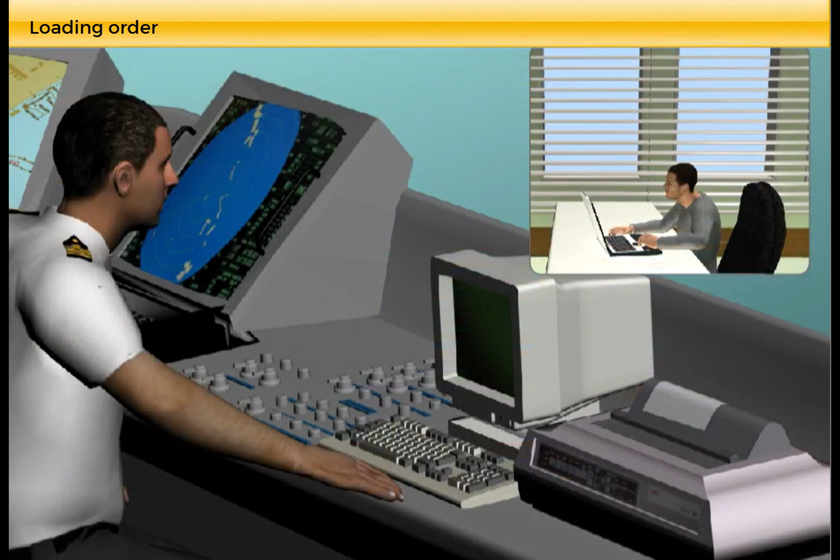Why are the implications of receiving an early loading order more important for chemical, product and gas carriers than for crude oil tankers? The loading order is the basic information needed in order to prepare the vessel for loading. The loading order may vary depending on several factors. For example, the ship is trading worldwide in the spot market, trading worldwide on a time charter party, or trading as a shuttle tanker on time charter in a fixed area, etc.

Requirements for the notification of notice of readiness, laytime, etc. may vary. For crude oil carriers, the practical implications of receiving an early loading order rather than a late are less important compared with chemical, product and gas carriers. Crude oil tankers do not have to prepare the tanks, like water washing, gas freeing and inspecting the tanks for cleanliness, re-inerting or cooling down the tanks, etc., prior to loading the next cargo.

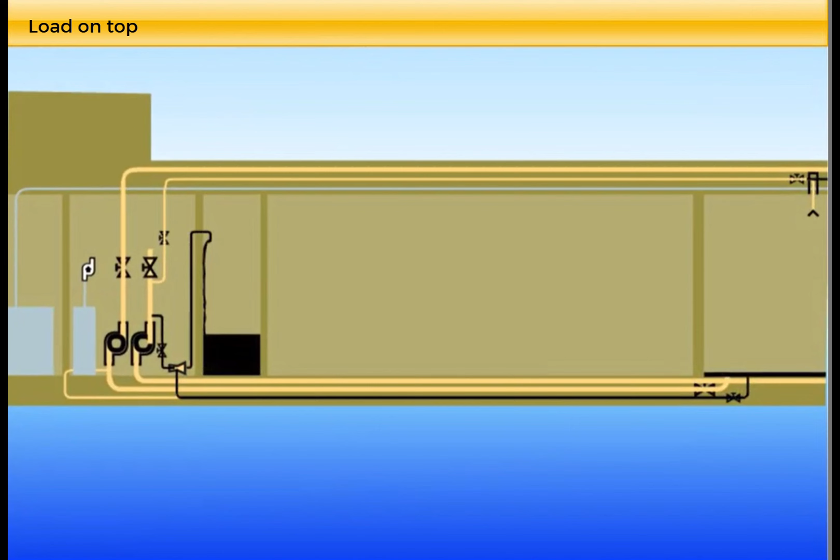In which event can the ship owner lose money because of not having all cargo tanks empty on arrival? When a crude oil tanker has carried out cargo tank cleaning during the ballast voyage, there will be slops and residues collected and stored in one slop tank. If there is any doubt about retaining the slops, the master must communicate this question to the owners and cargo owner or charterers and request their advice.

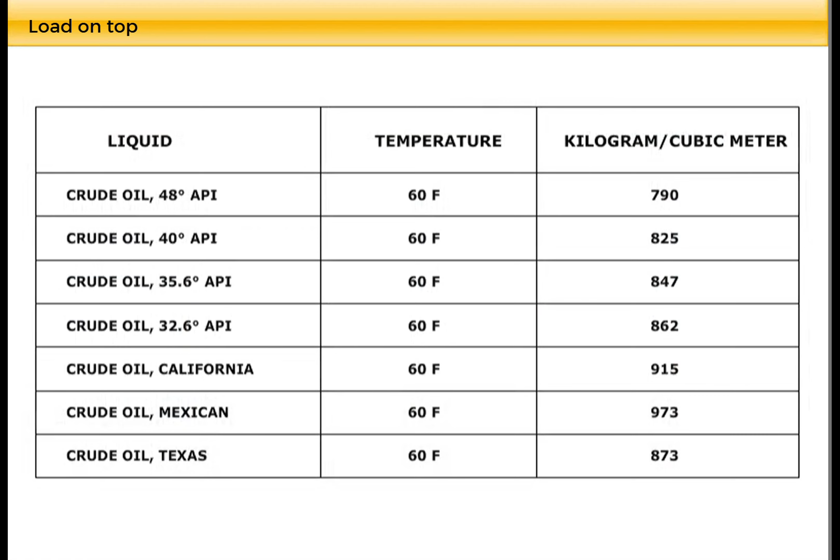Most charter parties provide for the charterer to make the decision regarding the disposition of slops. If the characteristic of the slop oil and the nature of the next cargo permit, the slops may be retained on board and the next cargo loaded on top of them. This is normally done with crude oil cargoes when the same or similar crude will be carried on the next voyage.

The charterer may wish to load on top, or LOT, in which case full freight will normally be paid. Charterers may require the slops to be discharged. The time required to do this normally constitutes laytime used.

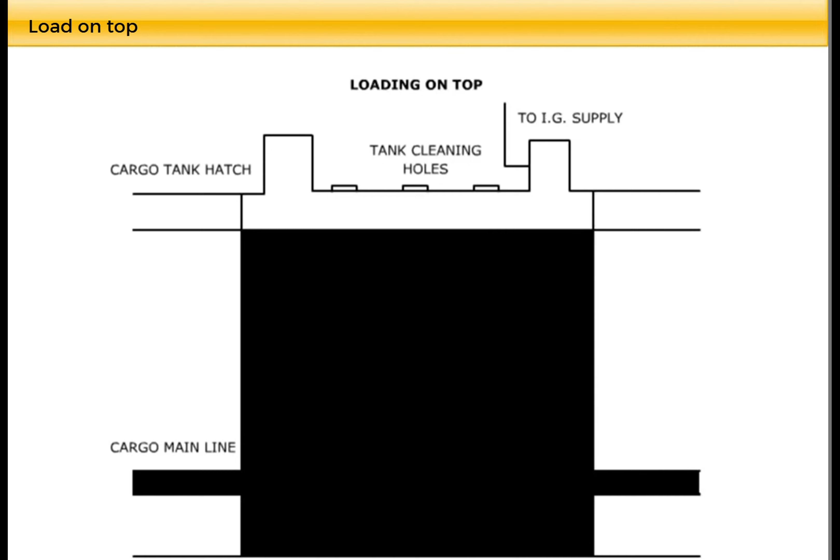If the charterer does not wish to load on top, the slops must be segregated and freight will not be paid to the ship owner on the space or deadweight used. A normal procedure in such cases, and in order to load full deadweight, is that the slop is sold and the vessel deslopped to a slop barge prior to loading.

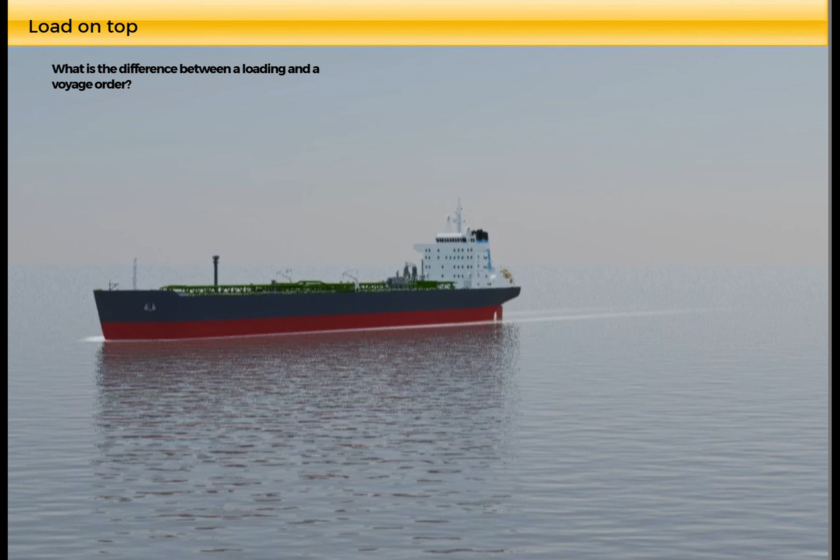What is the difference between a loading and a voyage order? A voyage order is an instruction from the owner or operator or charterers to the vessel's master about where the vessel shall sail after completion of a port call. Even if the next cargo is not settled yet, the vessel needs some kind of instruction on where to sail. For instance, proceed to outer anchorage, drop anchor and wait for further orders, or proceed to Fujairah for orders, etc.

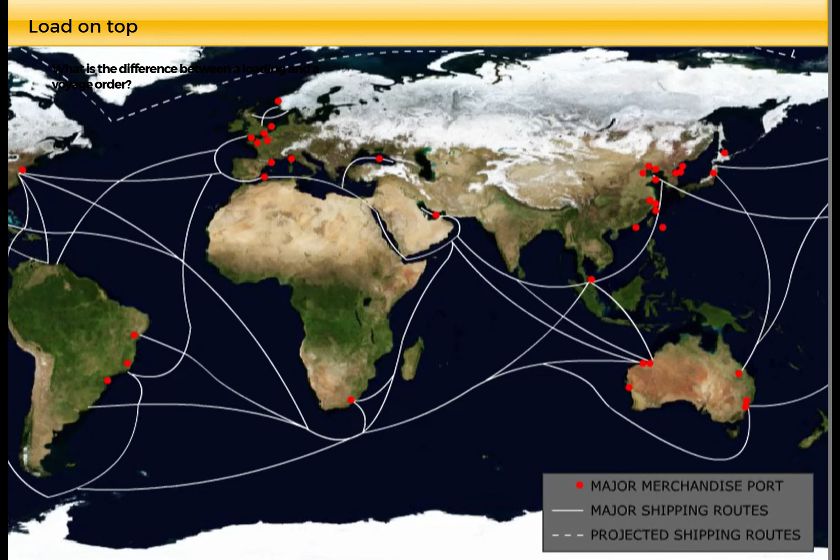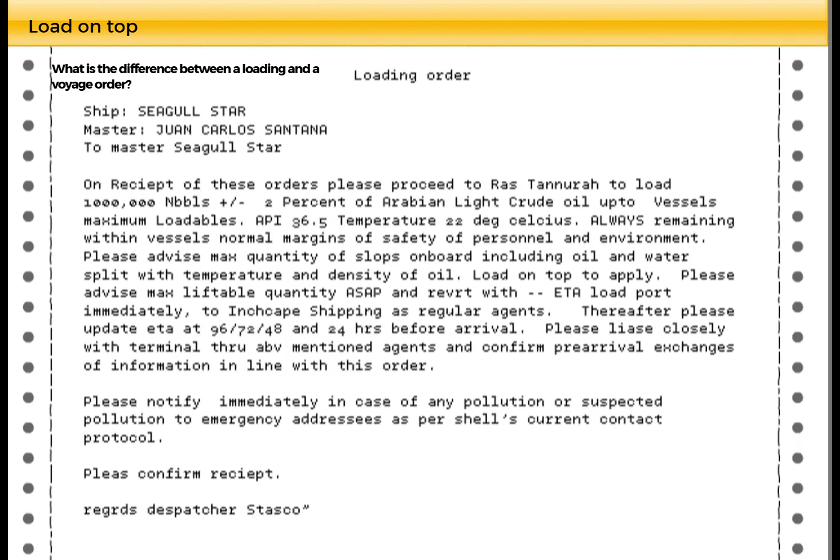The loading order is the specific instruction to proceed to a port or terminal and load a specific cargo, or several grades of cargo and quantity. The loading order also includes an indication of the discharge port or area, which needs to be considered with respect to draft and air draft restrictions during the voyage and at the discharge port. Based on the loading order, the loading plan is worked out by the chief officer.

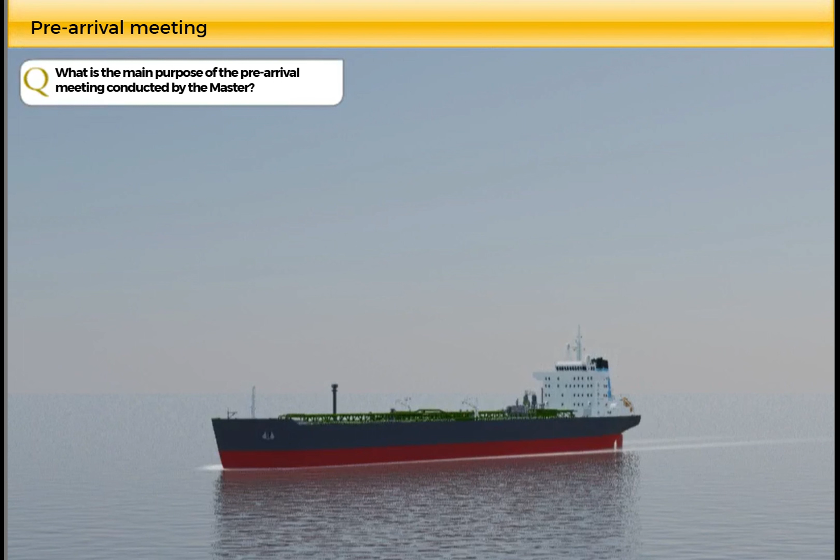What is the main purpose of the pre-arrival meeting conducted by the master? A pre-arrival meeting is performed in different ways, depending on the vessel's trade. The master normally conducts the meeting, and the main purpose of the meeting is to ensure that all officers and crew are acquainted with the time schedule and activities expected to take place during the port call.

Through this time schedule framework, the risk assessments associated with each in-port activity and the ship's plan for mitigating each of those risks is communicated. The contingency plan, which is the result of risk assessments, should be highlighted in the meeting.

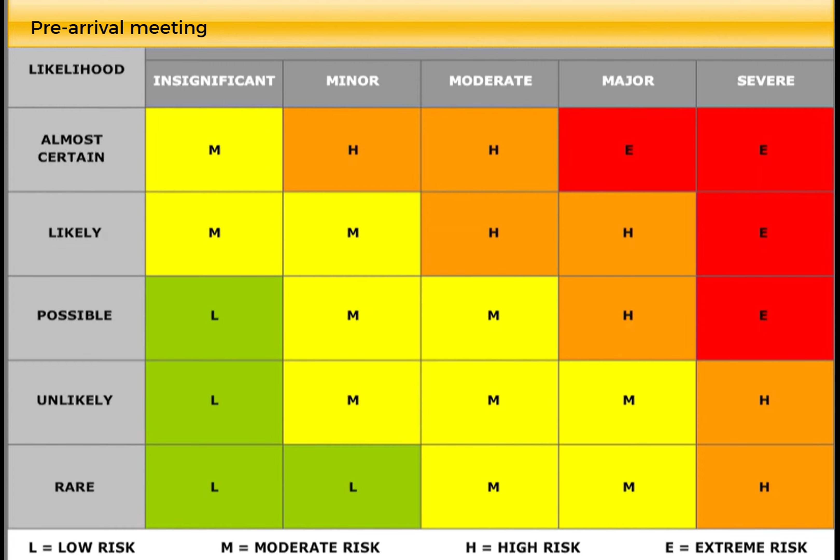Besides the main purpose of a port call, loading or discharging, other activities can be STS lightering, special security measures, crew change, stores and provisions, bunkering, external technical service for the vessel's equipment, various external inspections, etc. In addition, crude oil carriers are frequently involved in ship-to-ship, STS, transfer operations, either for loading or discharge. STS operations are labour-demanding, and because of their nature, subject to special MARPOL regulations.

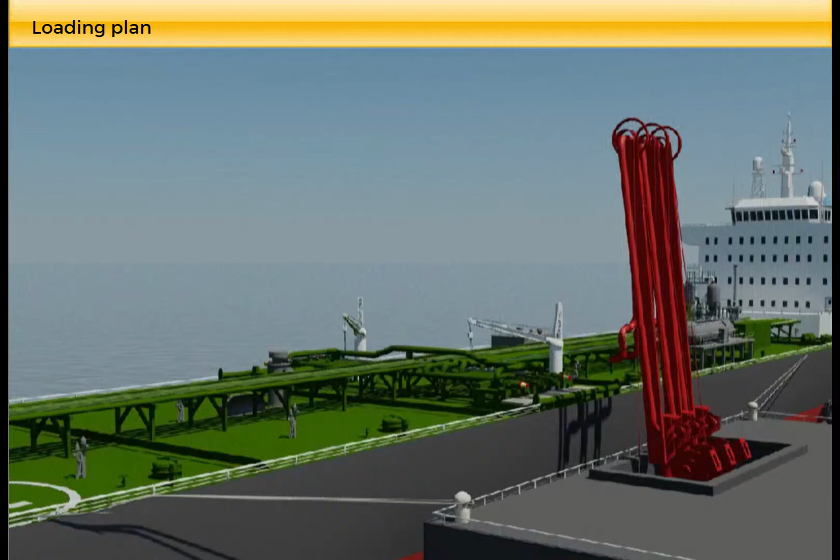Who is responsible for making the loading plan? As soon as the loading order is received, the chief officer, who is responsible for making the loading plan, starts to pre-plan and work out a preliminary loading plan.

What does the loading plan consist of? The loading plan is a comprehensive and detailed schedule that comprises a time bar, which begins at the start of the planned loading and describes the precise steps to be taken, which cargo tanks to start loading in, the tank ullages at which to stop and change over to other tanks, and which ballast tanks to deballast from in a sequence of stages until the completion of the operation.

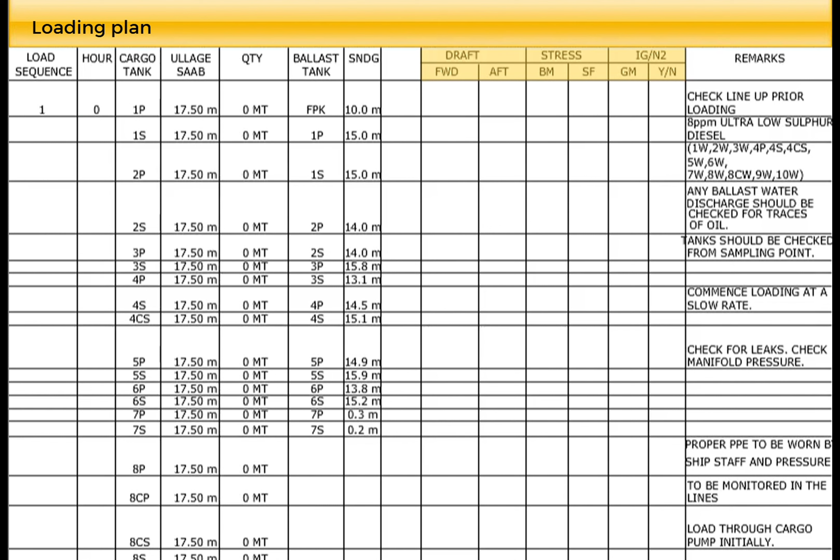The ship's draft fore and aft and the shearing force and bending moments on the hull when each stage is reached are calculated in advance using the loading computer and shown on the loading plan time bar. These calculated drafts and stresses ensure that the ship's hull remains within the permissible limits as prescribed in the class-approved loading manual.

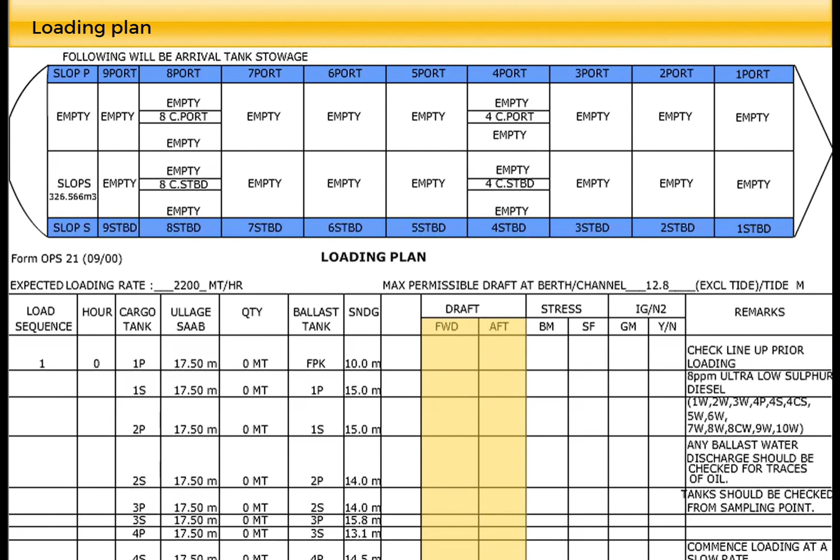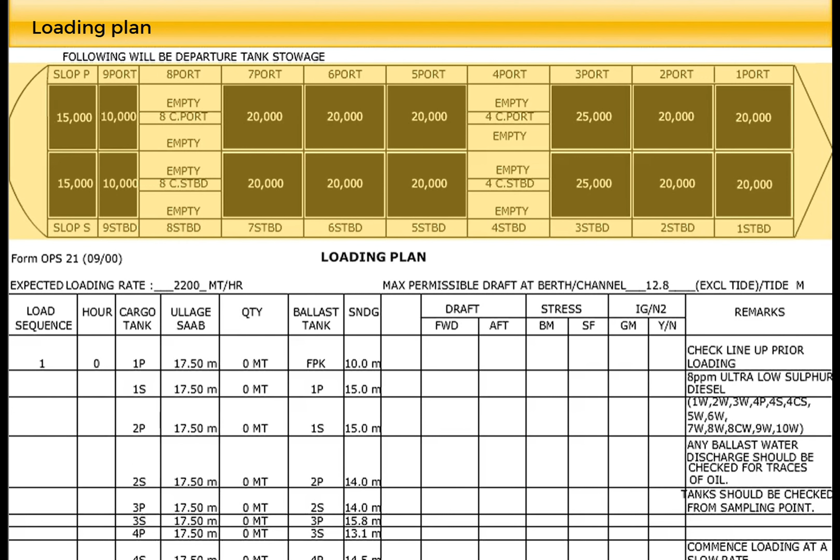Throughout the operation, the indicated tank ullages help junior officers and the pumpman to know when a certain stage of the loading is reached, and the next steps should be taken. Comparing visual drafts with those shown in the plan helps the officers in ensuring that the loading is going safely according to the plan. The plan also shows cargo specifications and a tank diagram spreadsheet with details on cargo grades, quantity, and their distribution into different cargo tanks.

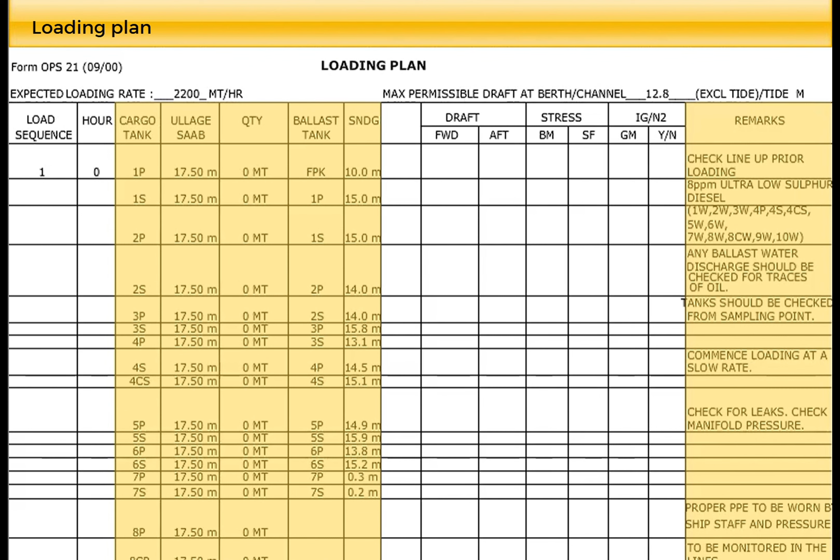Further, the plan details line and valve systems to be used and loading rates, starting rate, full rate, and topping off rate, as well as the deballasting schedule. The chief officer conducts a meeting with the junior officers, such as the second and third officer, pumpman, and boatswain, in due time prior to arrival. The purpose of this meeting is to have their acknowledgement of full understanding of the loading plan.

Who must be familiar with the loading plan? The second and third officer are responsible duty deck officers during loading, and consequently need to be fully familiar with the vessel's cargo system. To assist them during the operation, they have the pumpman, who is a qualified technician and responsible for maintaining the cargo equipment. In addition, they have the boatswain, who is the leader of the deck crew.

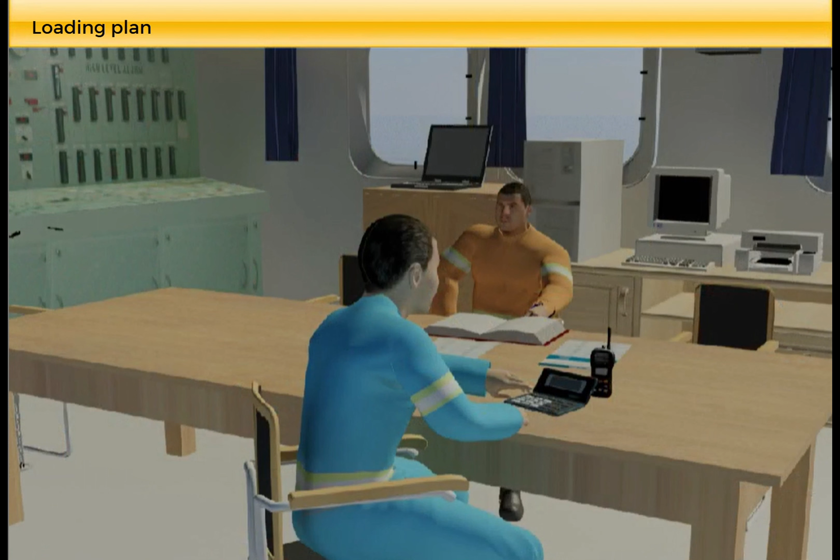The loading plan made out by the chief officer prior to arrival must be considered as a preliminary plan, which cannot be completed until after the ship shore meeting.

What is the purpose of the pre-arrival checklist? Since the introduction and implementation of the International Safety Management Code, or ISM Code, mandatory from 1998, ship owners or other companies responsible for operation of ships have had to develop and implement safety management systems, both for the ships and shore-based organization. The safety management objectives of the company should provide for safe practices in ship operation and systems to monitor and document onboard activities where needed.

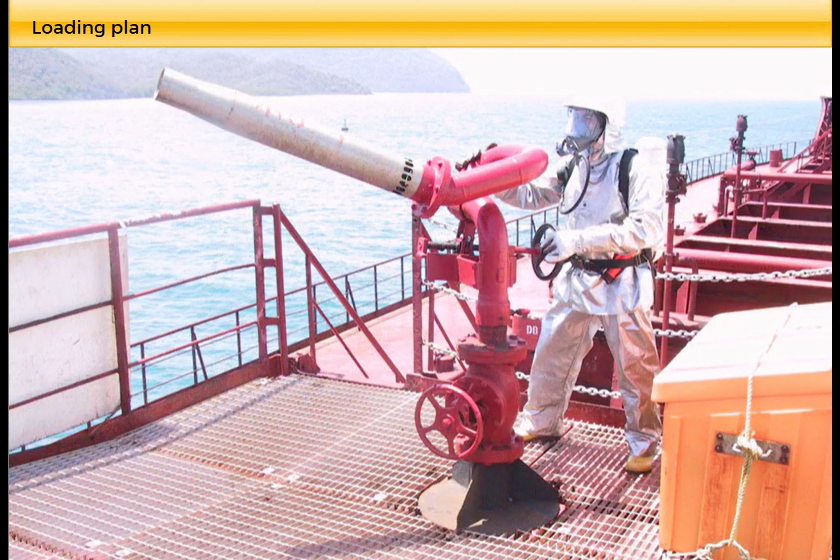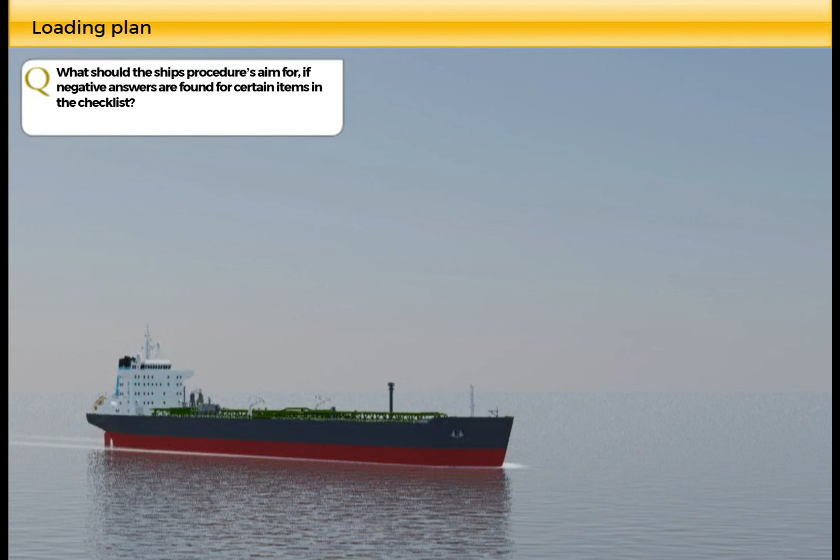Checklists to document safe practices and compliances with rules and regulations, as well as the company's policy, have been developed and implemented as industry standard in connection with various operations on board. What should the ship's procedure aim for if negative answers are found for certain items in the checklist? The checklist must be completed in ample time prior to arrival, in order to allow for repairs of malfunctioning equipment or call for external service upon arrival.

Any negative answers in the checklist must be reported to the owner or operator in order to make a common effort to ensure the vessel's safe and efficient port call without any delays. Who carries out the tasks? The pre-arrival checklist is a comprehensive record of preparations carried out in order to document that the vessel is arriving in a condition according to the company's policy and international rules and regulations.

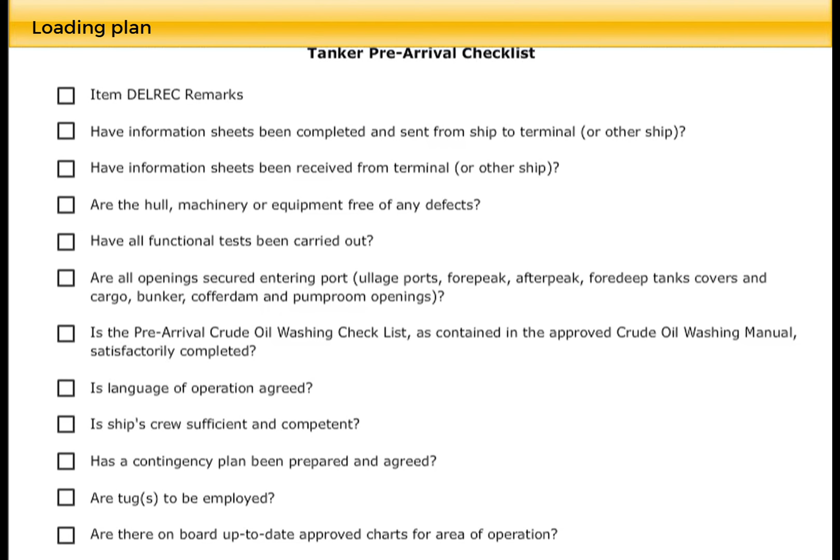All junior officers, including the pumpman and boatswain, as well as the engine officers and crew, will be engaged in testing and checks in order to complete the pre-arrival checklist. In the engine, all the technical systems required by the checklist are to be tested, and the result reported back to the Chief Officer. These tests must include operation of the cargo and inert gas pipelines valve operating systems, hydraulic power packs or boilers for cargo pumps, inert gas systems, ballast and stripping pumps, and alarms and trips of all these.

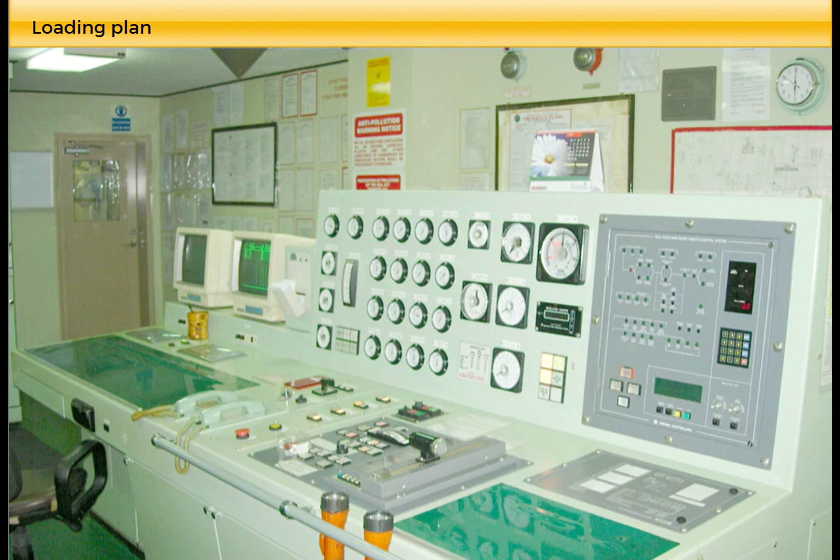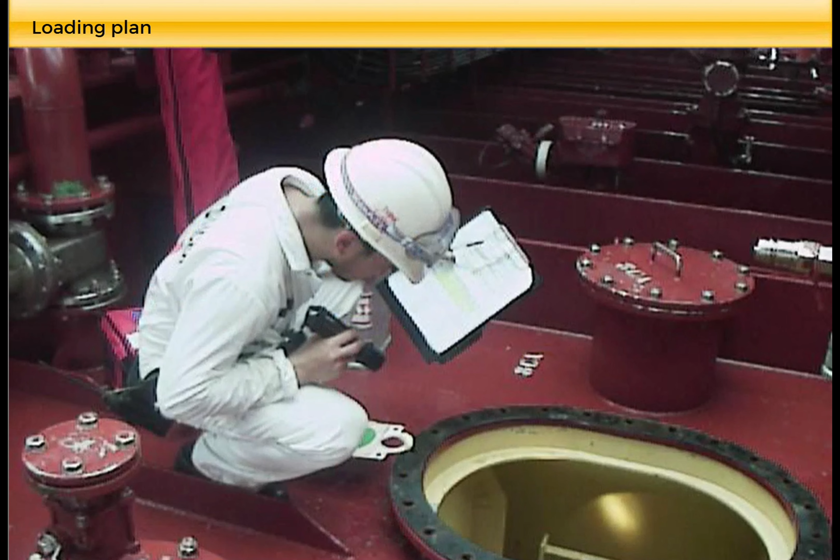The junior deck officers are responsible for checking their designated equipment and systems, such as firefighting and life-saving equipment, navigational instrumentation, etc. The pumpman is responsible for function checking of all cargo-related safety systems and equipment. The boatswain with the deck crew must check and prepare all mooring equipment, oil pollution prevention equipment, accommodation ladders, pilot ladders, hose handling cranes, and deck scuppers, and assist the pumpman with preparation of the cargo manifolds to be used.

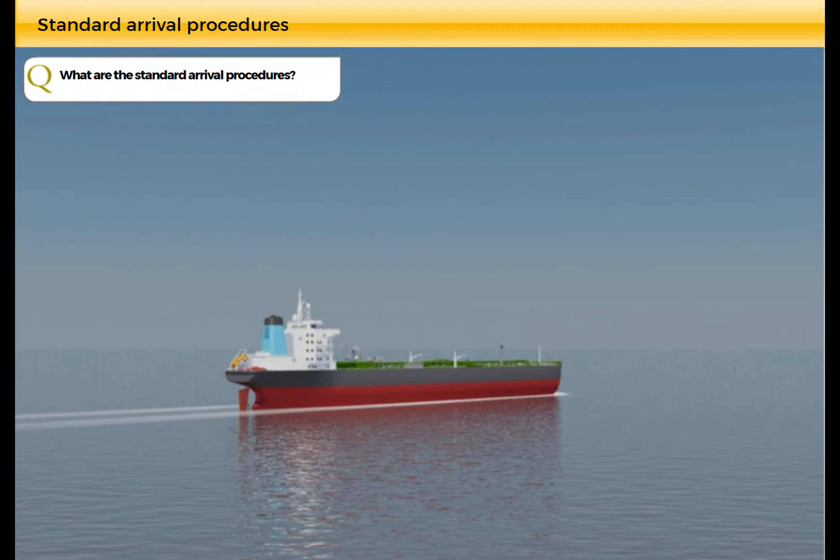What are the standard arrival procedures? When the vessel arrives at port, she passes through the standard activities: pilot on board, entering into port, and moving alongside terminal or SBM buoy assisted by tugboats. Who is responsible for the various tasks? As soon as information on which side alongside has been received, the boatswain and the crew make ready the moorings and, together with the pumpman, prepare the cargo manifolds.

When well moored and the pilot and tugboats are off, the security checkpoint is established at the gangway, and the vessel's port watch system enters into force. When the vessel is cleared by quarantine and customs authorities, the loading master or terminal representative and cargo surveyors board the vessel. The cargo surveyors are representing the shippers and cargo owners or charterers.

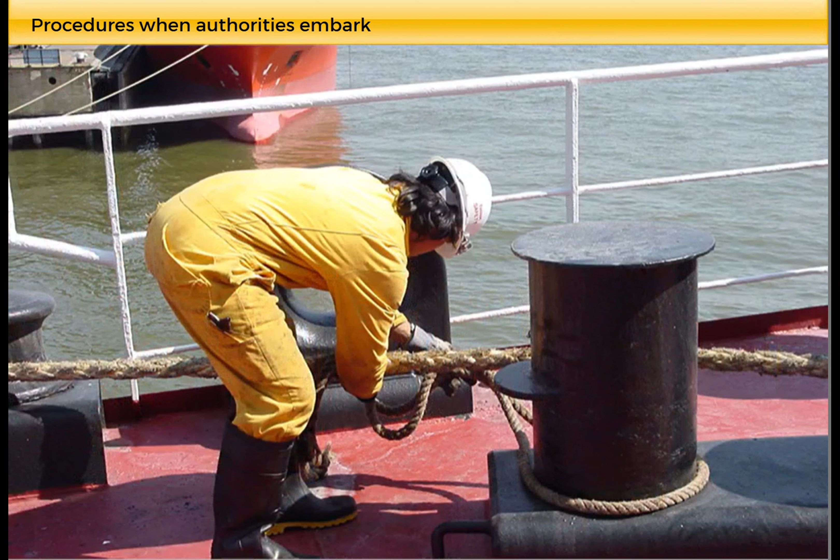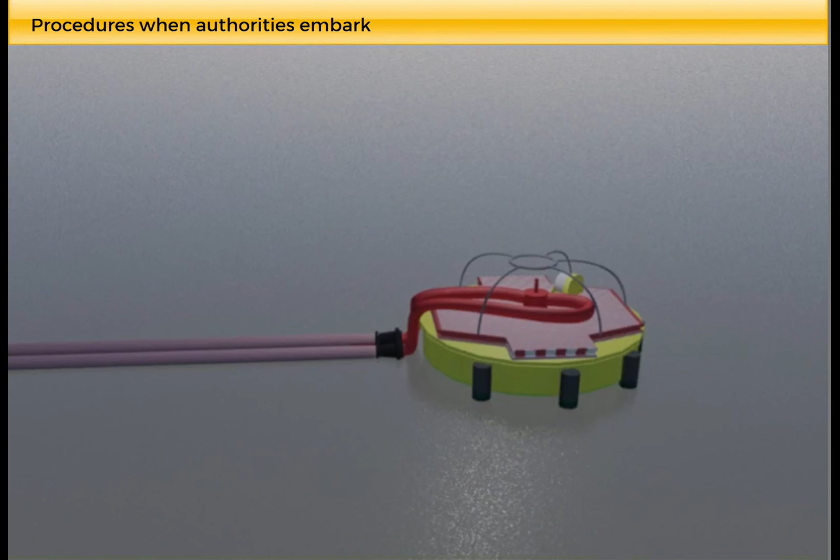The loading master and his terminal staff or crew normally inspect the vessel's manifolds and mooring arrangement before connection of hoses or arms is initiated. From the vessel's side, the duty deck officer is now in charge of the activities on deck under the supervision of the Chief Officer. When berthed to an SBM for loading through floating hoses, the hose connection operation is more demanding and requires experienced hands in addition to supervision of a loading master or his assistant.

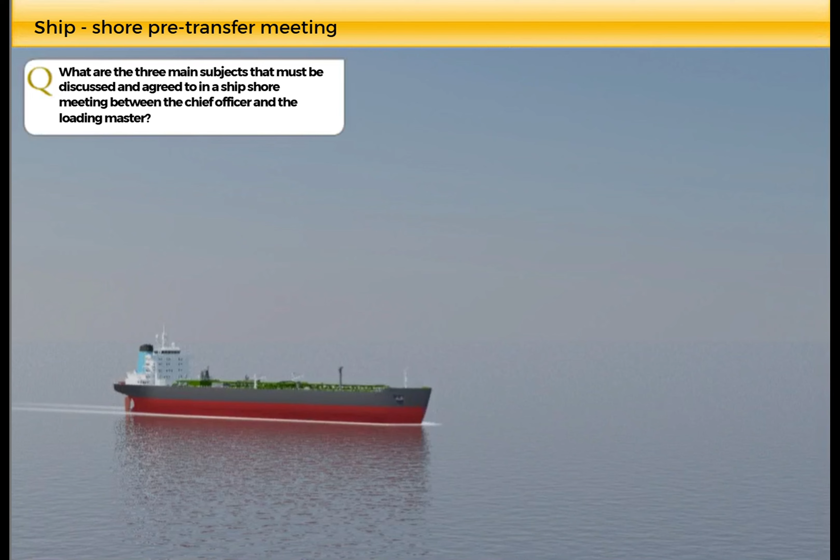What are the three main subjects that must be discussed and agreed to in a ship-shore meeting between the Chief Officer and the loading master? A ship-shore meeting is held in the Chief Officer's office or cargo control room, or CCR, or ship's conference room, for pre-transfer exchange of information.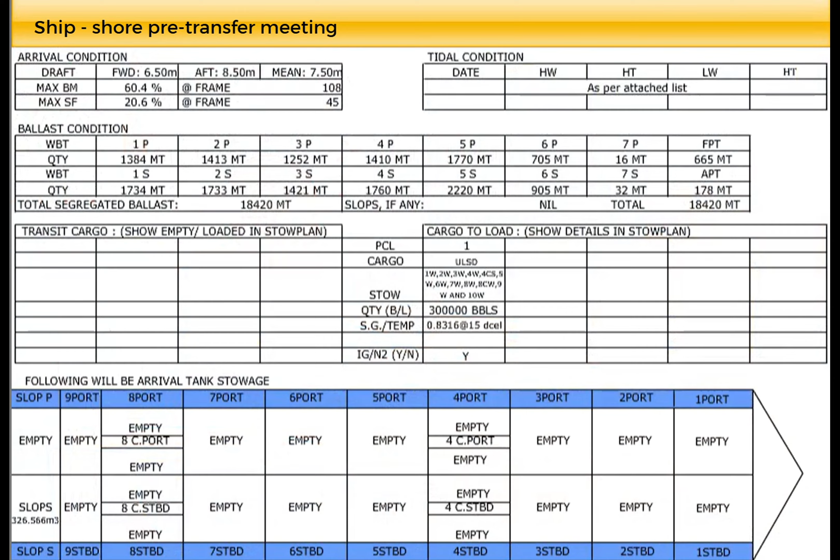The three main areas covered are the loading plan, the safety, security and environment protection, and the communication and emergency stop procedures. Details of the ship's loading plan, usually also communicated before arrival, are discussed, and if in agreement with the terminal's plans, are finalized.

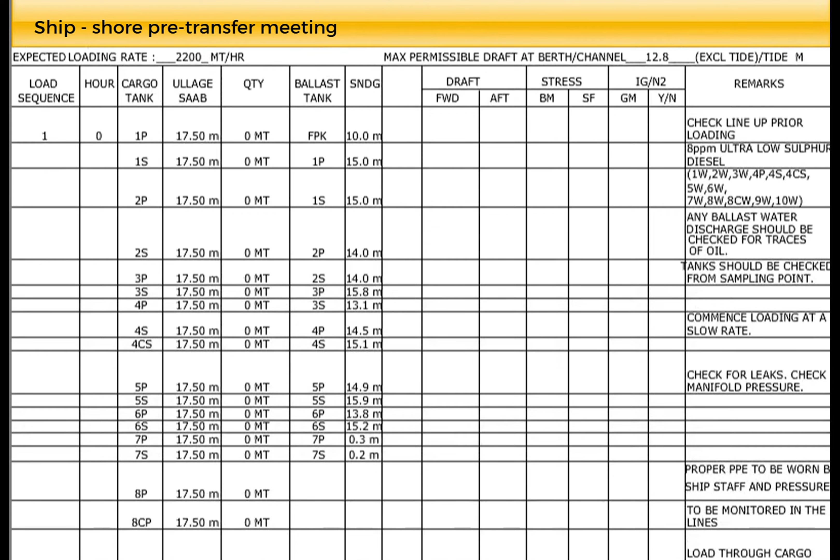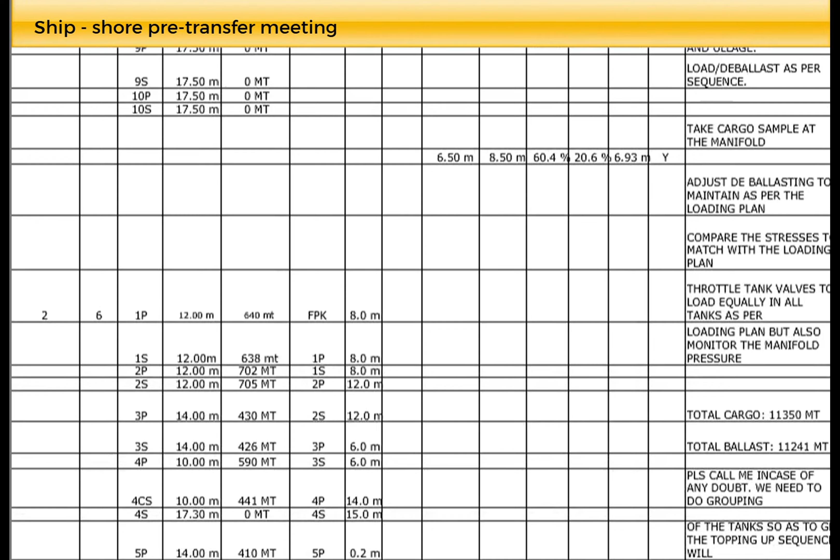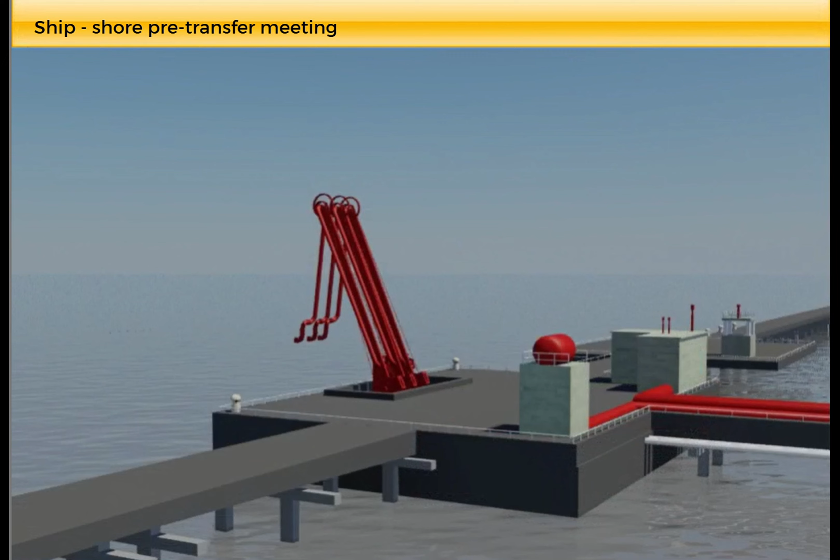The items normally revised and added will be the time schedule, including loading rates on starting and topping off, deballasting operation, ship and shore tank changeover, avoidance of contamination of cargo, and pipeline clearing on completion of loading. Safety, security and environmental protection regulations of the ship as well as the terminal are important matters to be discussed and agreed on. Finally, the communications channels and emergency stop procedures are explained and tested.

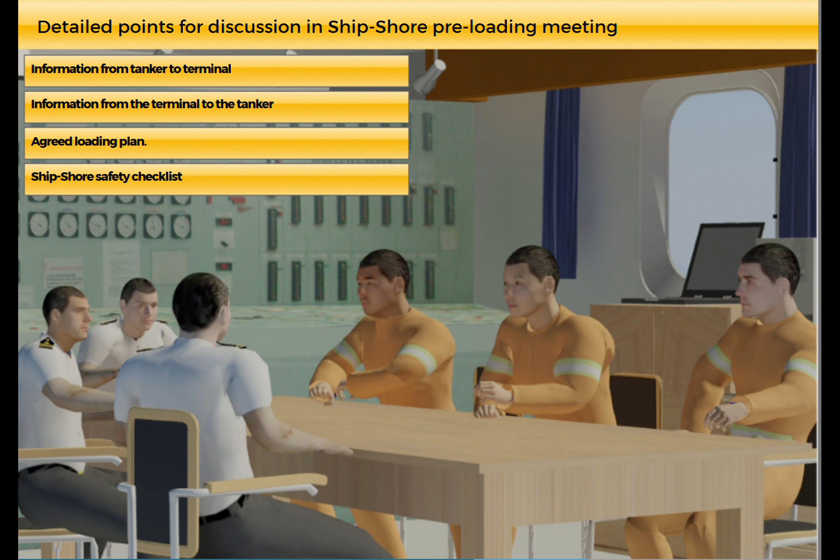Click on the buttons below to view detailed checklists for various areas to be covered in this ship-shore pre-transfer meeting. Information from tanker to terminal. Information from the terminal to the tanker. Agreed loading plan. Ship-shore safety checklist. Ship-shore radio communications test and emergency stops. Posted plans and placards.

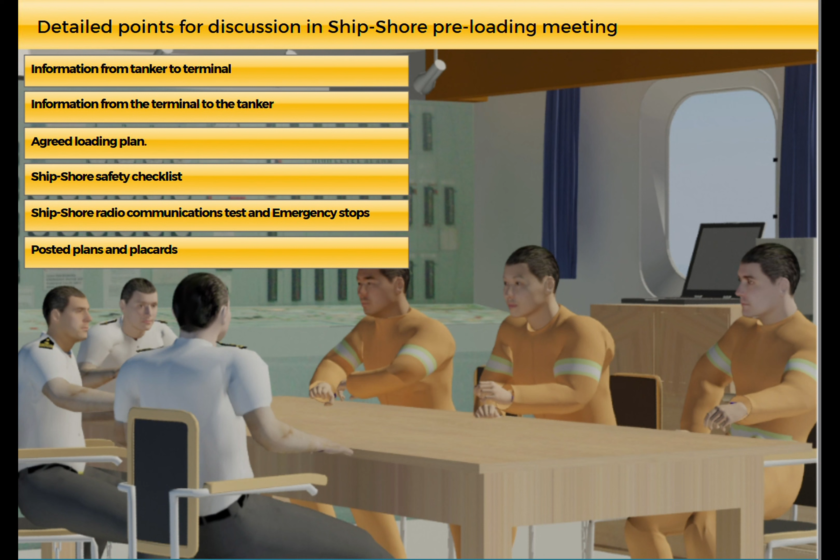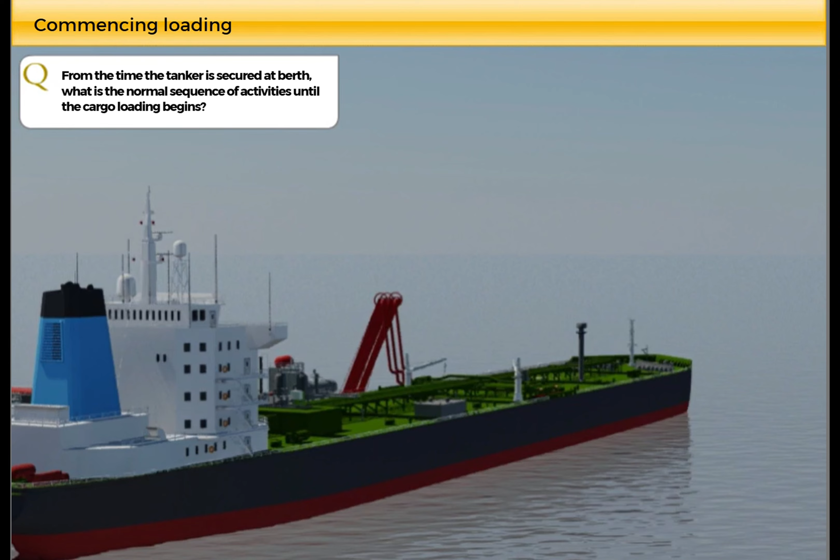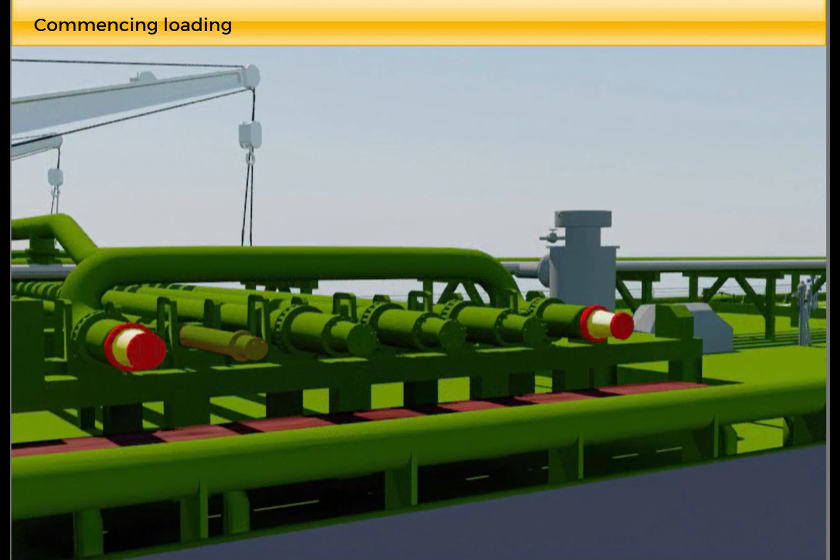From the time the tanker is secured at berth, what is the normal sequence of activities until the cargo loading begins? The cargo loading normally commences according to the following procedure. Formalities with port authorities and terminal or loading master are completed. Cargo hoses or arms are connected and unused manifold connections blanked. The vapor return line is connected. VOC system prepared. Cargo surveyors complete the tank survey. On-board quantity, or OBQ, is calculated.

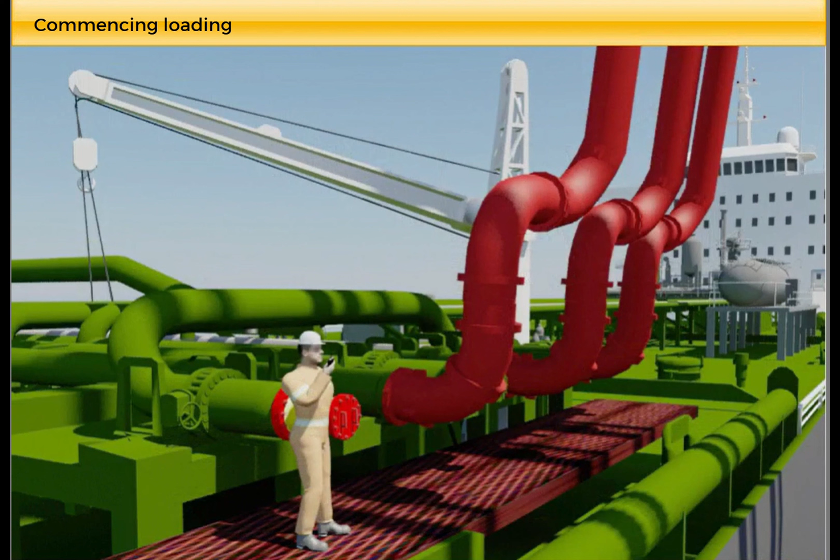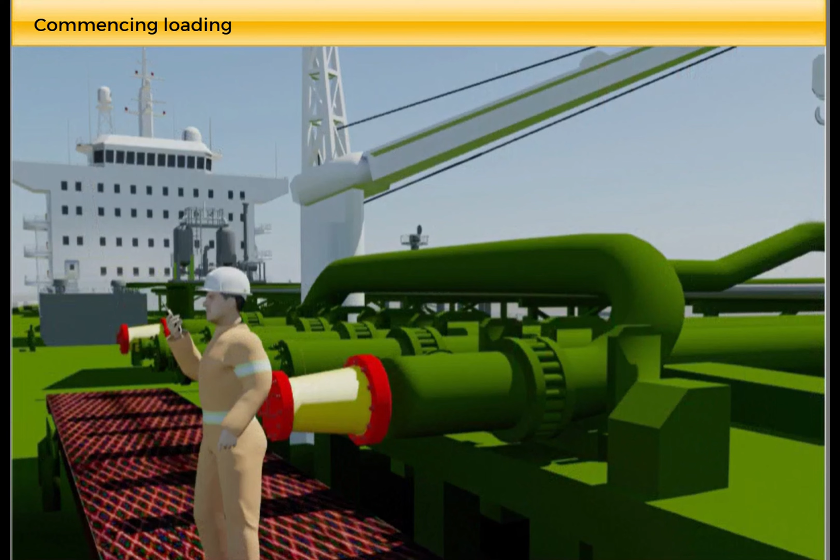Lining up of lines and valves to be used, both onshore and on board, under the supervision of the Chief Officer and Loading Master. When lining up is completed, the Chief Officer reports to the Loading Master that the vessel is ready to receive cargo, except for manifold valves which still are closed. The Loading Master orders the vessel's manifold valves to be opened according to the agreed loading plan. When the manifold valves are confirmed open, the Loading Master orders loading to start, first with line displacement at reduced rate.

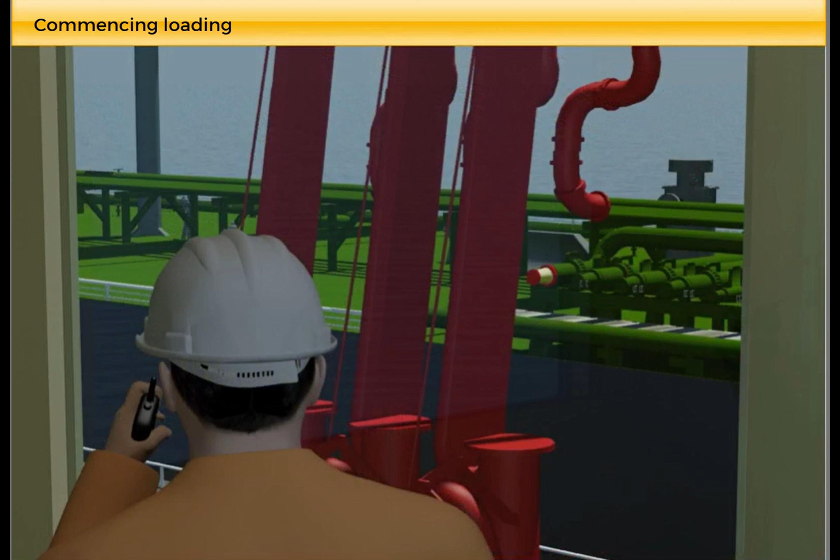The duty deck officer, pumpman and boatswain with deck crew must, during this sequence, check valves and lines in use to ensure that no malfunction or leaks have occurred when the cargo oil entered. To ensure that there is correct lineup of valves for drop lines, bottom lines and tank valves, the first cargo is taken into one tank at reduced rate. When confirmed that the oil flow is according to the loading plan, the remaining tanks are opened, and the loading rate is gradually increased.

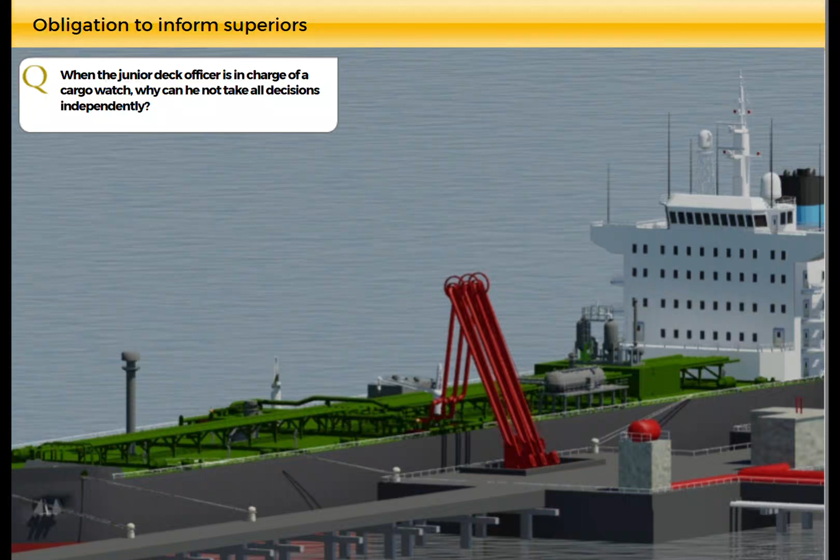When the junior deck officer is in charge of a cargo watch. Why can he not take all decisions independently? When the loading is well underway, the Chief Officer delegates the practical operation to the duty deck officer, pumpman and boatswain. The Chief Officer's standing order details the duty deck officer's obligation to inform the superiors in the event of incidents or accidents that may interfere with the operation, for instance oil leaks, breaking of moorings, thunderstorms, etc.

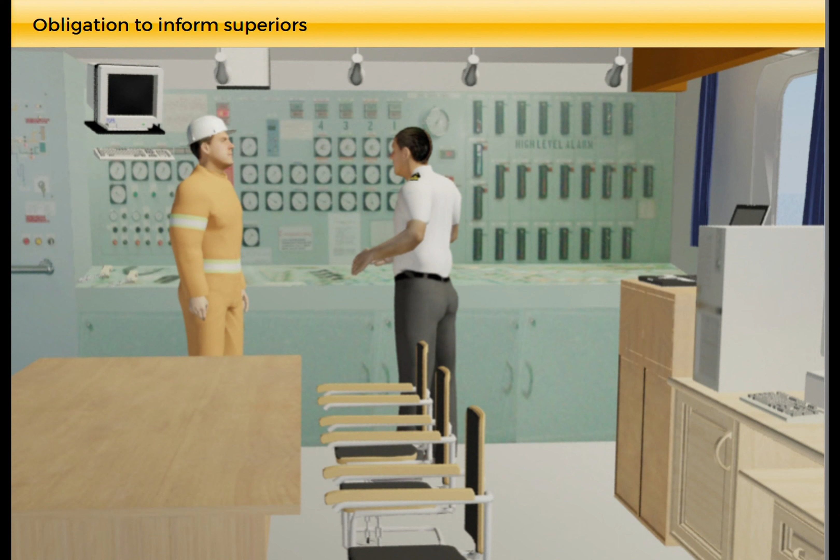In addition, the Chief Officer requires to be kept updated on the progress of the loading and any deviation from the loading plan, such as reduced loading rate or stoppages initiated by shore, etc. The need to inform superiors whenever in doubt is to prevent one-man errors during the operation, and to use the best experience available to address unforeseen risks which may occur from time to time, and which have not been allowed for in the plan.

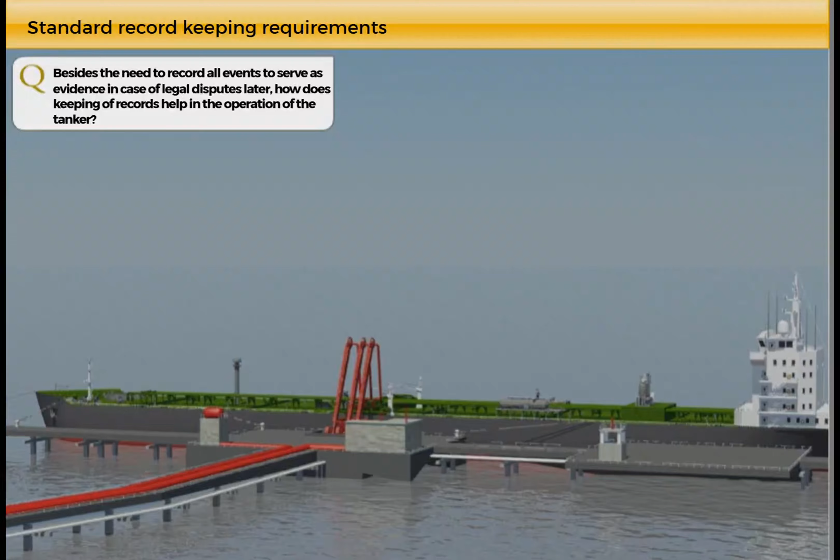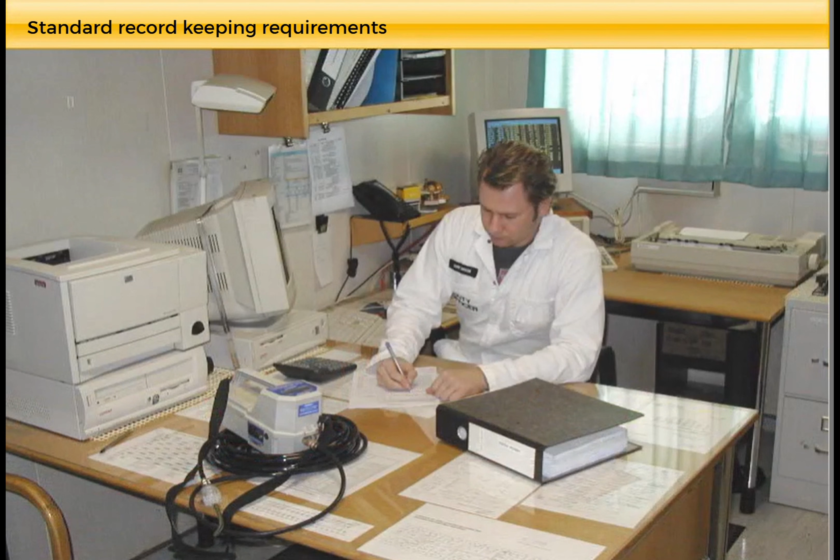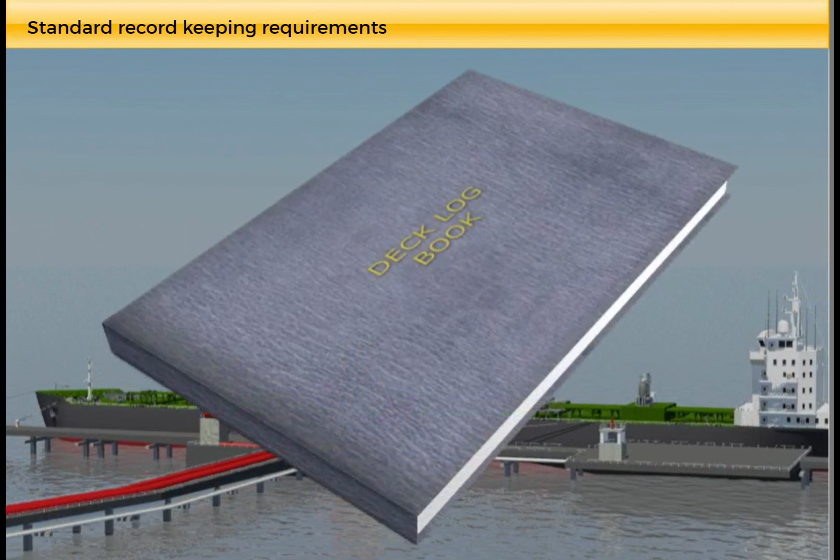Besides the need to record all events to serve as evidence in case of legal disputes later. How does keeping of records help in the operation of the tanker? The duty deck officer is responsible for recording all activities in the timesheet, which is one of the official documents to be enclosed with the final cargo documents. He is also responsible for recording all items required by the deck log, and to make regular checks and printouts of the vessel's condition according to the loading computer.

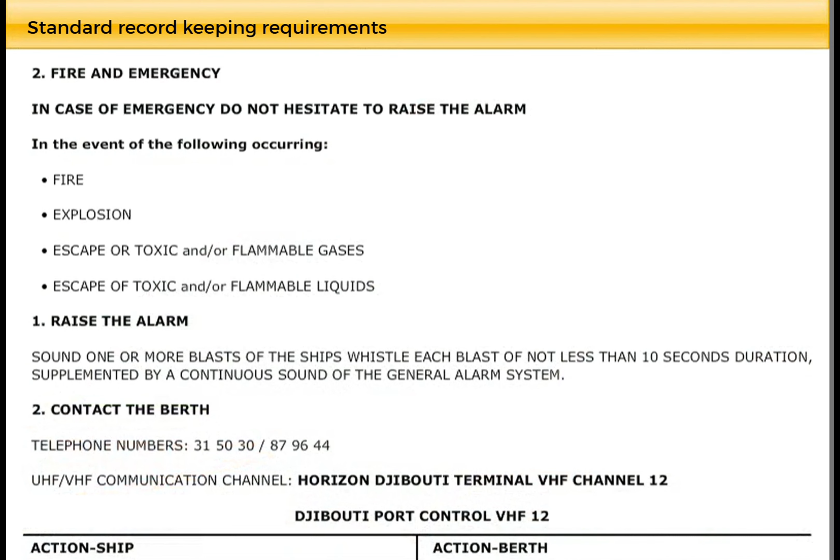Besides legal requirements, a good recording helps to review the operation in a debriefing after completion, and for continuously improving plans to be made by the ship's team. Emergency action must be taken by personnel on duty without waiting for the Chief Officer to come and take charge. In case of an emergency, the duty deck officer, pumpman and boatswain must be familiar with the first response action to be taken, and the sequence of alerting as per the ship-shore safety checklist and emergency telephone list.

Emergency response. Click on the button to learn more.

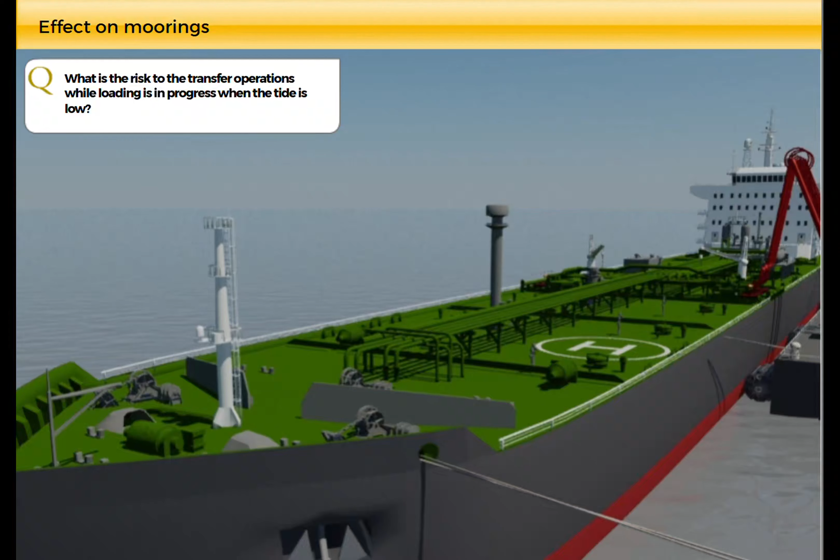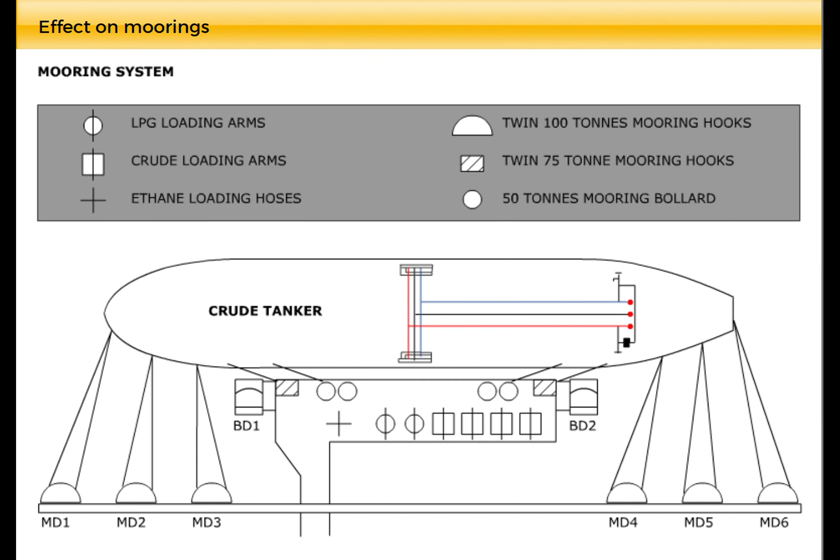To the transfer operations while loading is in progress when the tide is low. As the sea level goes down with the tide and the vessel goes down deeper into the water due to cargo being loaded, the mooring ropes become slack. It is then possible that the vessel may move several meters off the berth.

The duty deck officer, in cooperation with the boatswain and the deck watchman, are responsible for adjusting the mooring ropes as the vessel changes draft and trim, and as an effect of tide. If the terminal's loading arms come under strain, it will become necessary to stop the cargo transfer and tighten the mooring ropes until the vessel is secure alongside again.

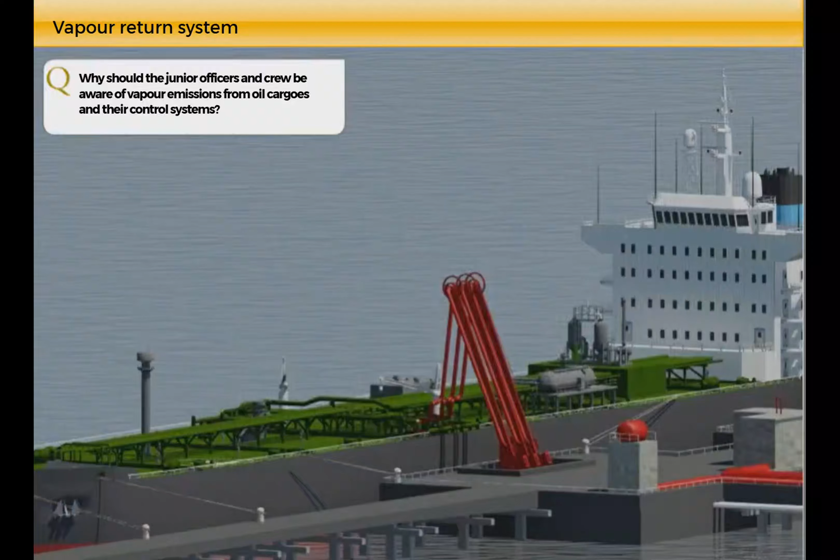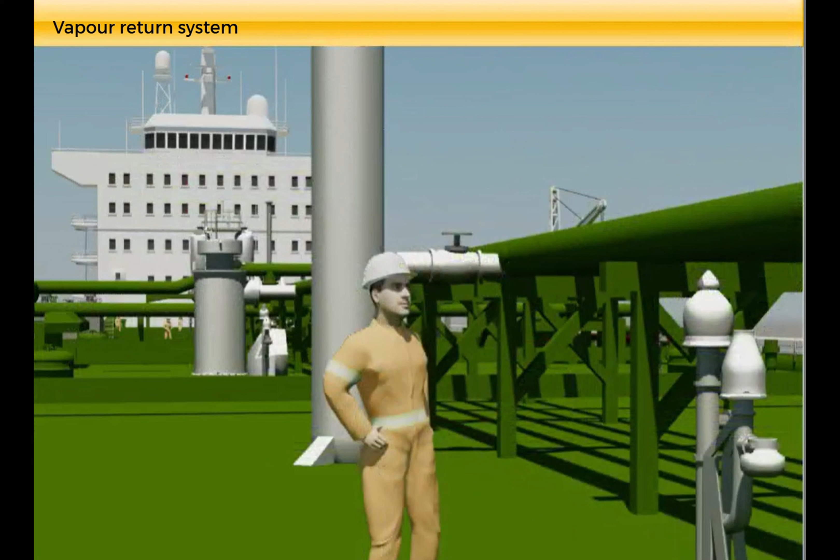Should the junior officers and crew be aware of vapor emissions from oil cargoes and their control systems? The junior officers must be familiar with the operation of the vessel's vapor emission control system. Although it is mandatory to equip crude oil tankers with either a vapor return system or volatile emission control system, at present only a few terminals are equipped to receive the vapor in return from ships.

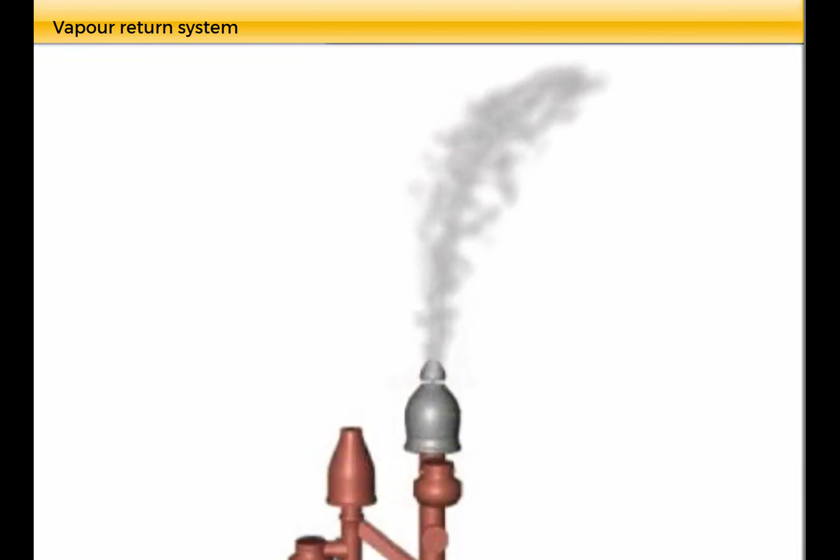Vapours emitted from oil cargo are toxic and can harm human health. Emissions into the atmosphere are also prohibited by law in more and more ports around the world. For Volatile Emission Control System, VOC, see Seagull's CBT number 0196.

Since pollution by oil is no longer a threat from ballast water, what is the reason for increased regulations and controls when deballasting? Since the introduction of double-hulled crude oil tankers, where the ballast water is carried in the double-hull side tanks and completely segregated from the cargo tanks, the risk of oil pollution has been reduced dramatically.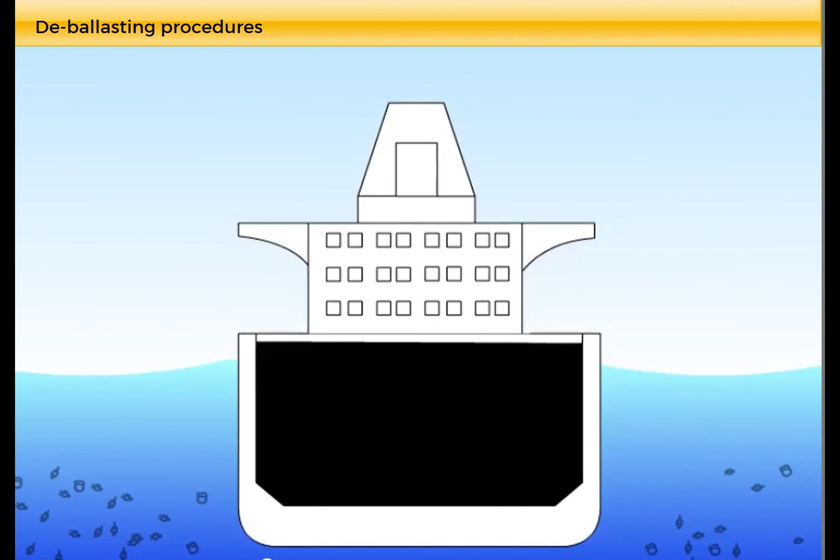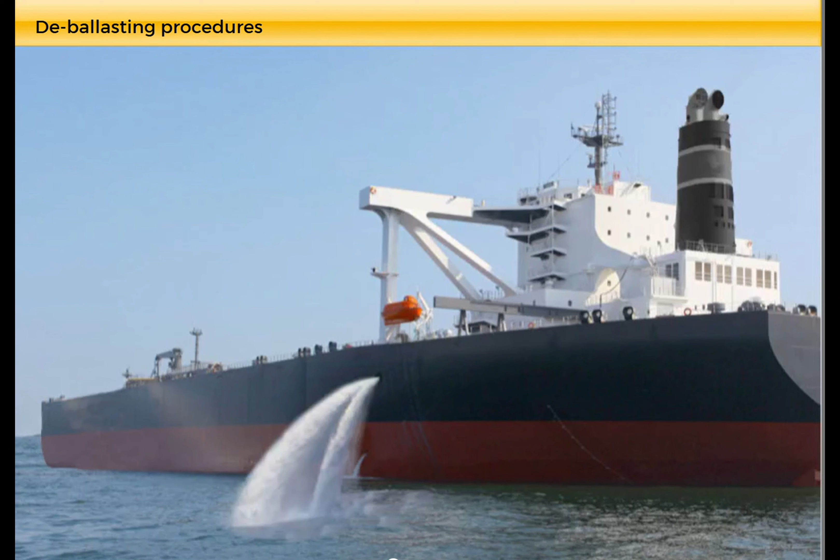The old single-hulled crude oil tankers, SBT and CBT Category 1, 2 and 3, are being phased out according to MARPOL regulations and are not included in this module. Ballast water carried by crude oil tankers is governed by IMO and MARPOL's stringent regulations. Because of environmental issues, new regulations require all vessels to carry a ship-specific water ballast management plan.

The major concern now is to prevent biologically invasive species, such as the zebra mussel carried in ballast water taken in cargo discharge ports, which tend to destroy the delicate ecological balance at the cargo loading ports.

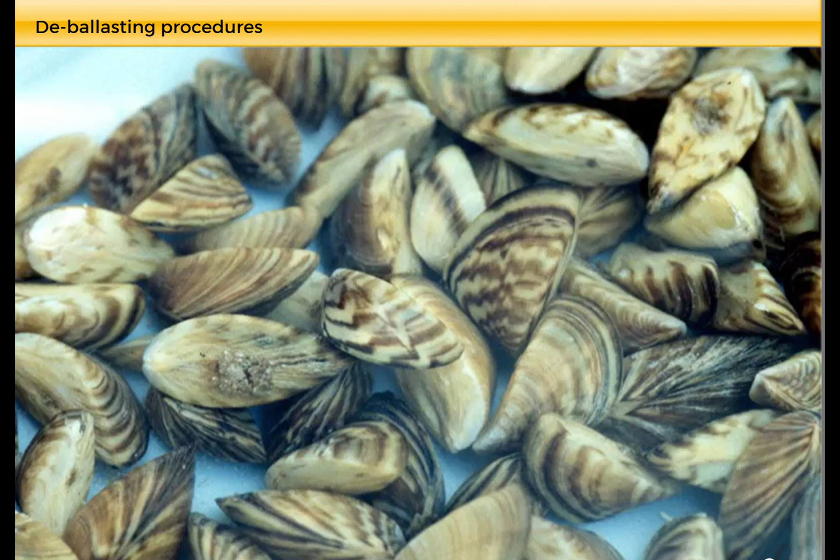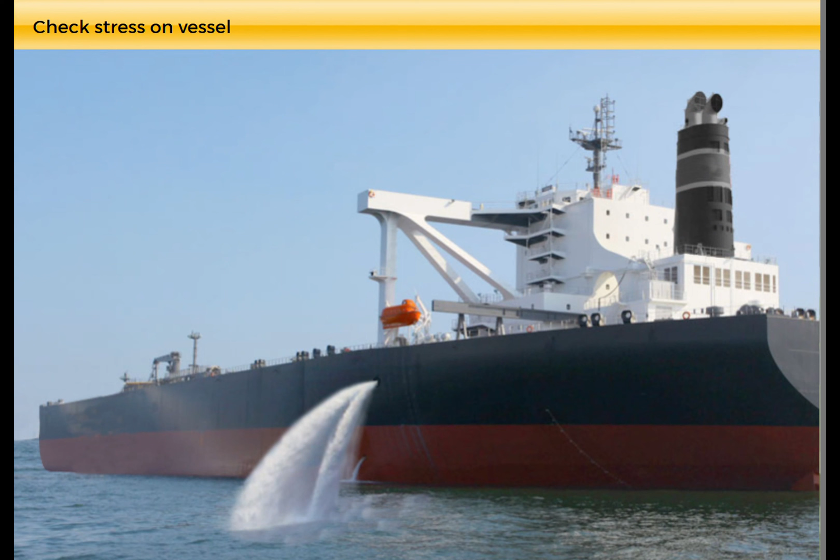What are the two aims of a well-planned deballasting operation? The junior officers or duty deck officers and the pumpman will normally operate the ballast pumps and carry out the deballasting operation simultaneously with the loading operation. It is important to carry out the deballasting operation as scheduled in the loading plan, both in order to avoid unwanted loads to the vessel's hull and to ensure that the ballast tanks are emptied and well drained in due time prior to topping off cargo tanks.

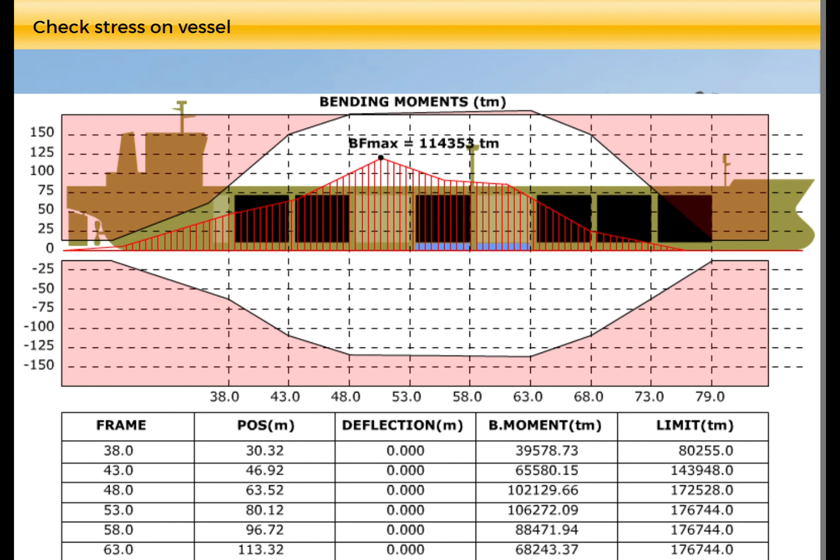When the deballasting operation is completed, the ballast handling records, as prescribed in the Water Ballast Management Plan, must be filled in.

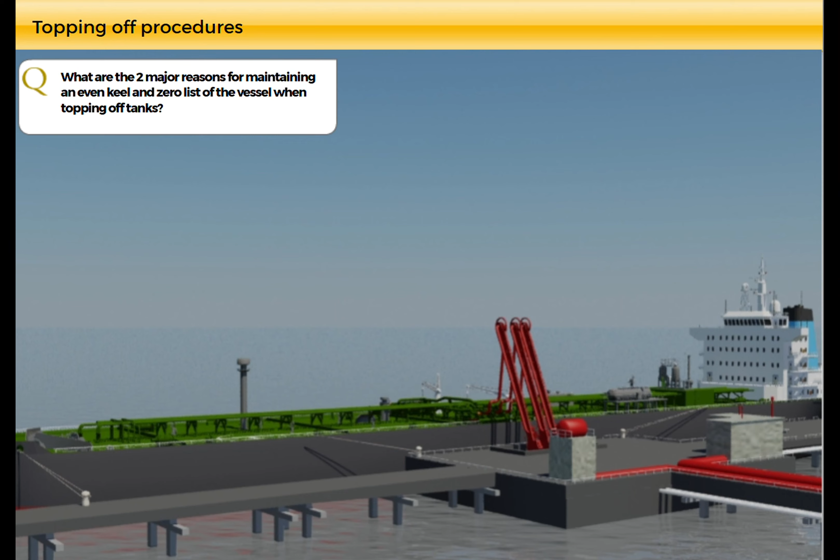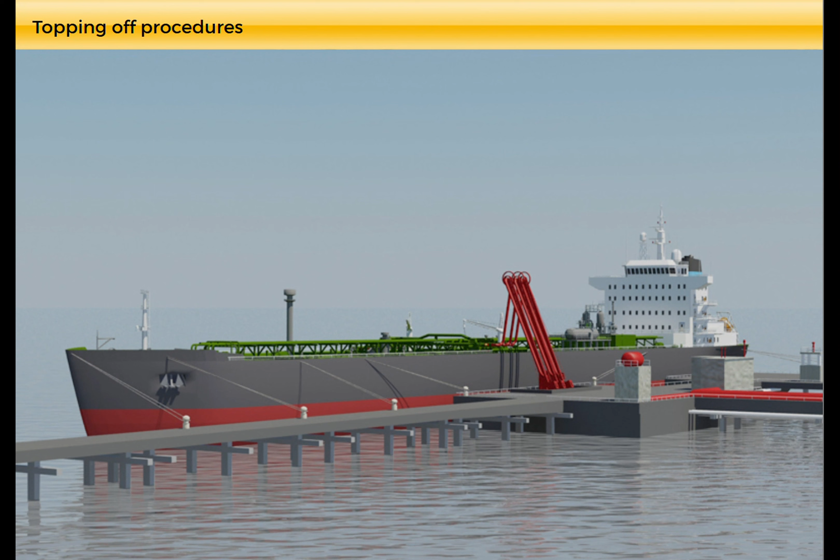Two main reasons for maintaining an even keel and zero list of the vessel when topping off tanks. If the vessel is loading more than one grade of crude oil, there will be reduced rate, topping off tanks and change of grade, all which require increased attention and will normally be supervised by the chief officer. On large crude oil tankers, it is important to keep the vessel as close to even keel and zero list as possible in order to reach the correct quantity in the tanks.

An even keel and zero list is also an important factor in case of an oil leakage from cargo lines or overtopping of tanks. Any oil on deck can be localized near its origin without flowing down the sloping deck.

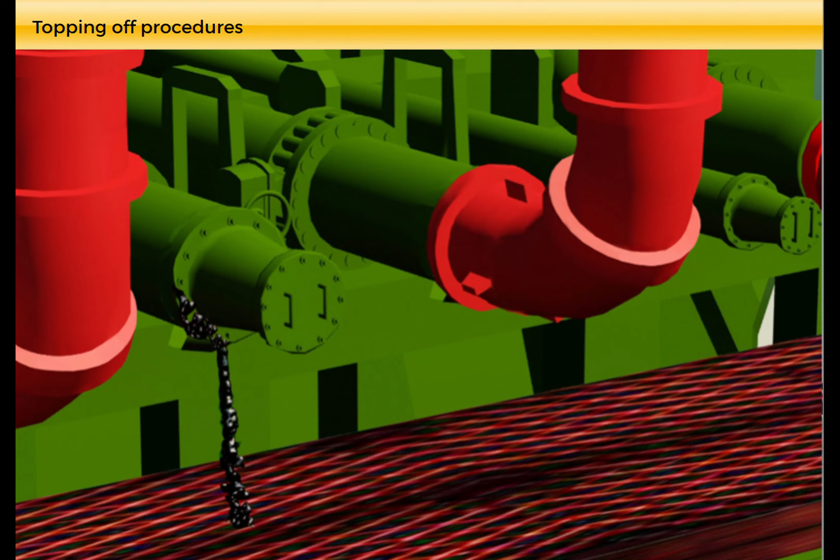Is all sampling and ullaging of cargo tanks done through totally enclosed gauging points? When the loading is completed, the cargo surveyors, assisted by the junior officers, pumpman, boatswain with deck crew, or those assigned to take part, start the cargo survey. It is now mandatory that all sampling, dipping for water, temperature reading, and ullaging must be through enclosed sampling hatches.

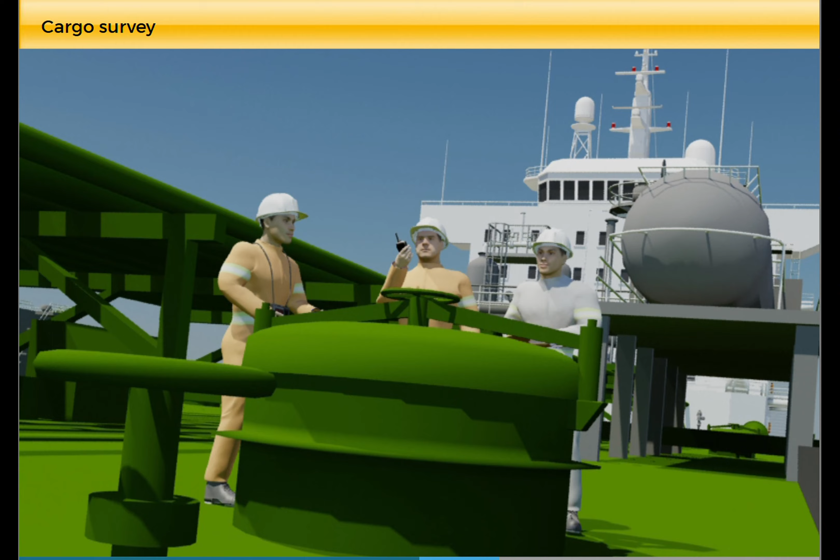The gauging points are totally enclosed to allow gauging to be done without toxic and flammable gases and VOCs from the cargo tank coming into contact with air and the people doing the gauging. At the same time as the cargo survey takes place, the cargo hoses' arms are disconnected and the manifolds blanked under the supervision of the duty deck officer.

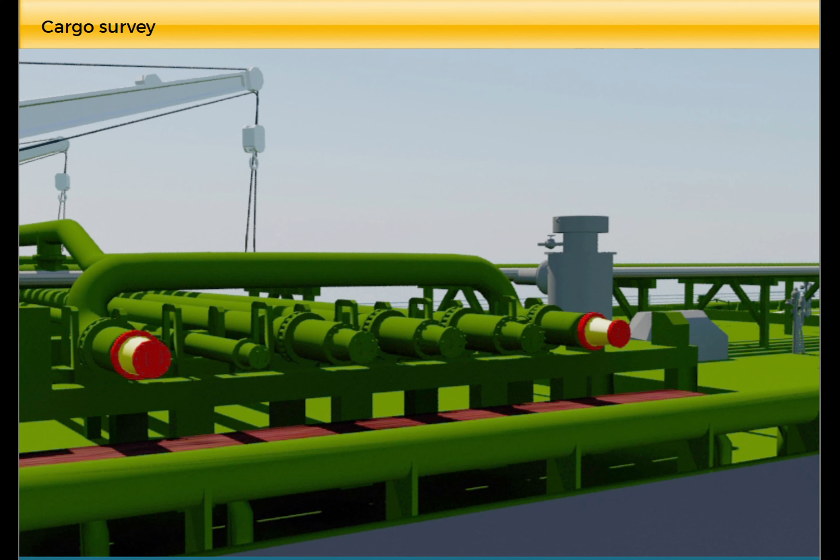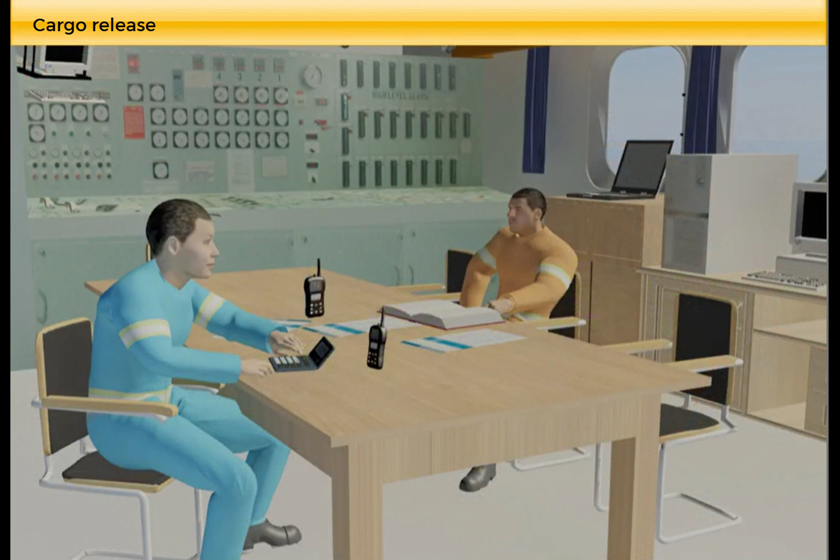When shore figures are taken to be the official final quantity of cargo loaded on board, why does the terminal require the ship's quantity calculated by the chief officer and the surveyor before releasing the cargo papers? When the cargo survey is completed, the chief officer and the cargo surveyors independently calculate the cargo, and when they are in agreement of cargo figures, the figures are given to the terminal.

If the ship and shore figures are equal or within acceptable difference limits, the cargo is released and the vessel can leave the port. The loaded quantity determined by the terminal is usually taken to be the final official quantity. However, if the cargo papers, such as the bill of lading, are released before the ship has checked its own quantities and found them to be close to the terminal's figures, then the master may refuse to sign the cargo papers.